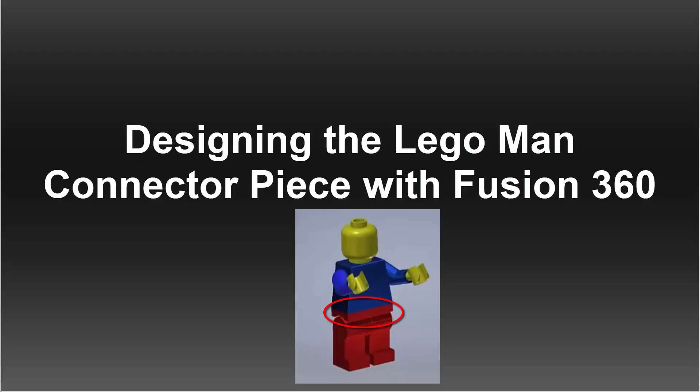Come on up to File, let's do a new design, and we're going to change our document settings from inches to millimeters in case you want to 3D print it. Then we're going to go ahead and start a sketch on our XY plane.

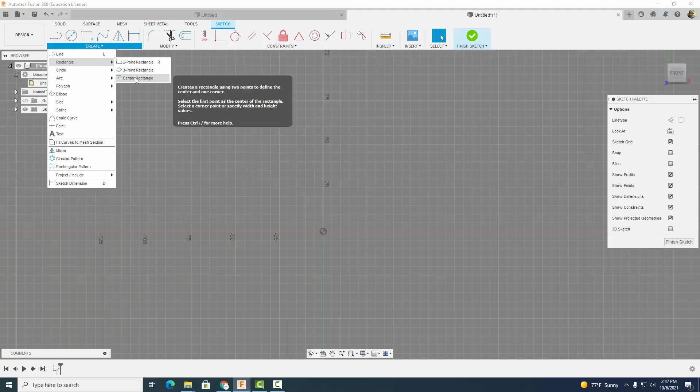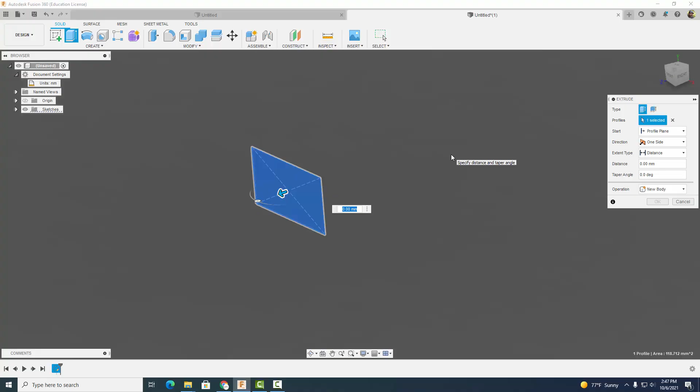We're going to come on up and grab our center rectangle, and drag out a square. I'm going to zoom in a bit. We want this distance here to be 7.81 millimeters. Hit the tab button, and we want our other distance to be 15.2 millimeters. Select Finish Sketch. We're going to extrude this a distance of 2.22 millimeters and select OK.

Now we're going to start a sketch on this face, and I'll rotate it over here, then grab our circle tool and drag out a circle with a diameter of 7.7 millimeters. We want this to be vertically aligned, and then we want this distance from here to here to be 3 millimeters.

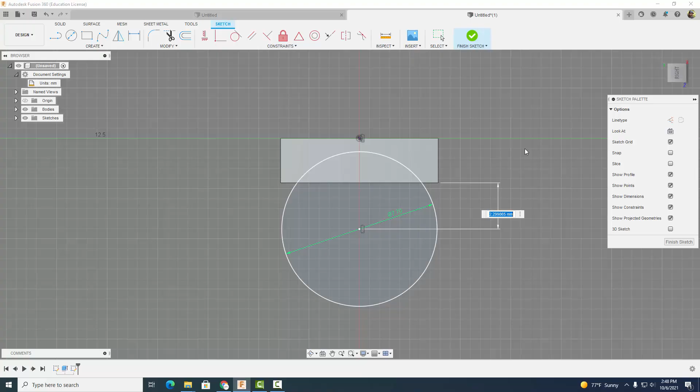Go ahead and hit escape and finish our sketch. Then we're going to extrude this and that a distance through all. Hit OK. So we have something that looks like this.

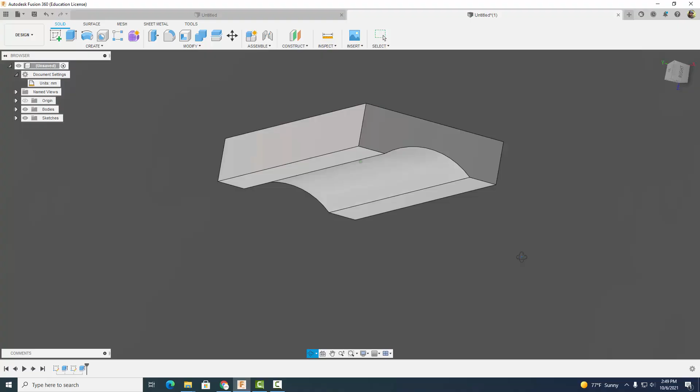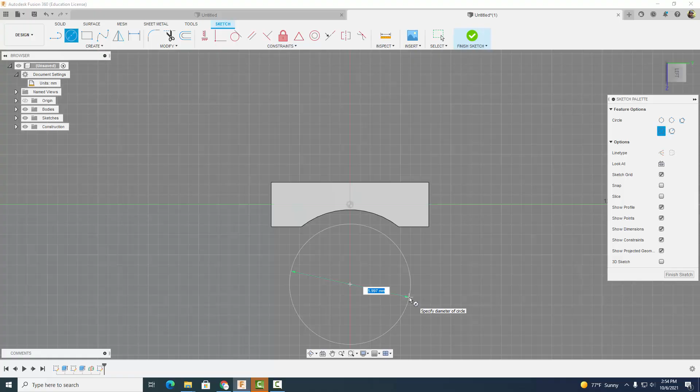Next we want to construct a midplane between this face and that face. Select OK, and we're going to start a sketch on that surface. I'm going to rotate it around, grab my circle tool, find this point, and drag out a circle with a diameter of 7 millimeters.

Hit enter. Now I'm going to grab my line tool, but let's project some geometry first. Let's come to project and do that face right there. Hit OK. Now let's use our line tool and come here straight down to our circle.

Now we're going to trim this right here, and we want this distance to be 0.4 millimeters. We want that on both sides to be consistent, 0.4, and we're good.

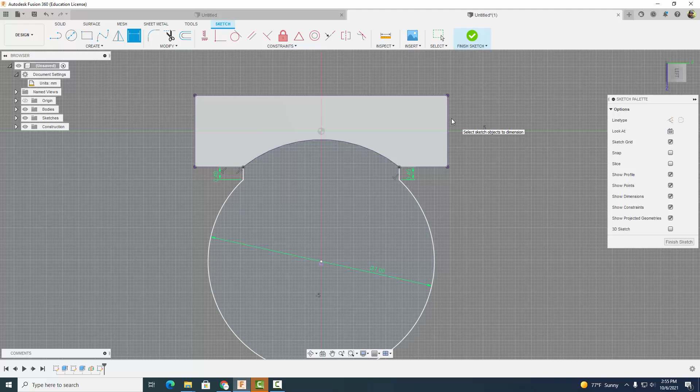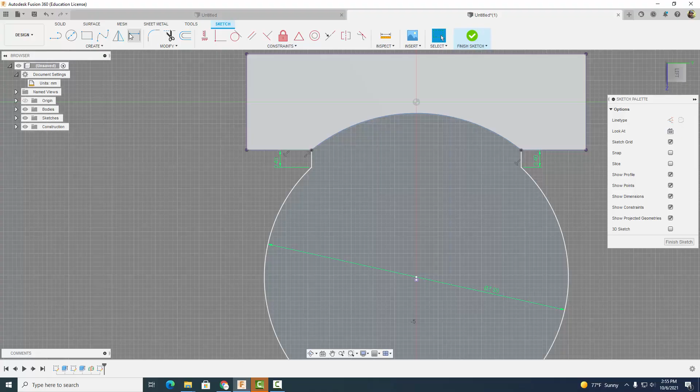Now I'm going to come over to my 3-point arc, click here, click there, and I want my line to be on that projected geometry. There's a way to double check that: if you hit escape and dimension this, recall the circle was 7.7, so we do 7.7 divided by 2, and there we go. Now we know we're on that line.

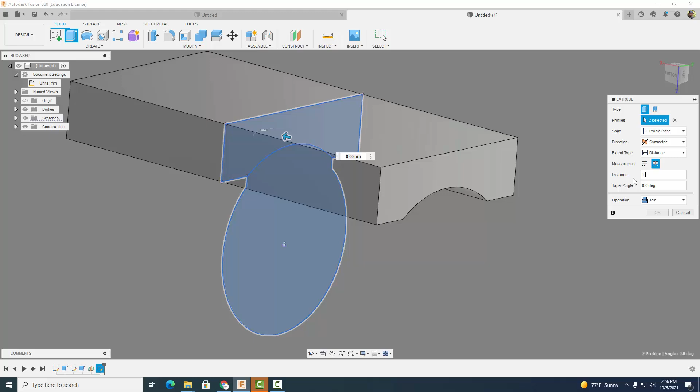Now let's finish our sketch and extrude this out. We're going to select a symmetrical way, a distance of, let's see here, that one and that one, and like I said, we're going a distance of 1.5 out. Select OK.

So you get something that hopefully looks like this. Now let's start a sketch on this surface. I'm going to rotate my part around and project some geometry, getting this circle right here. Hit OK. So now the center of the circle shows up.

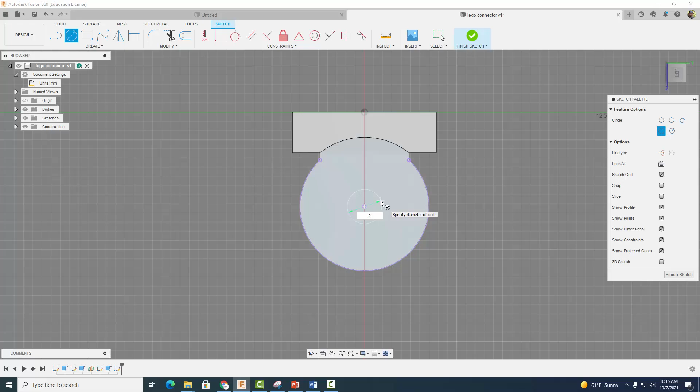We're going to grab our circle tool and create a circle with a diameter of 2.3 millimeters. Hit enter, let's finish our sketch. Then we're going to extrude this out a distance of 2.8 millimeters and select OK. Then we're going to start a sketch on the surface of this guy.

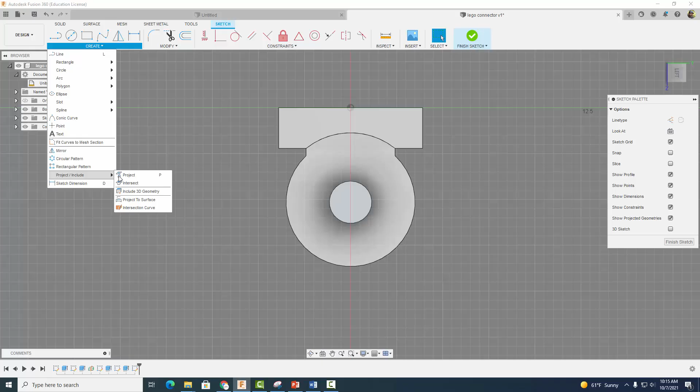I'm going to rotate it around just like last time, and project geometry just like last time. I'm going to zoom in, so now we have the center of the circle showing up. I'm going to draw another circle here with a diameter of 1.8. Hit enter.

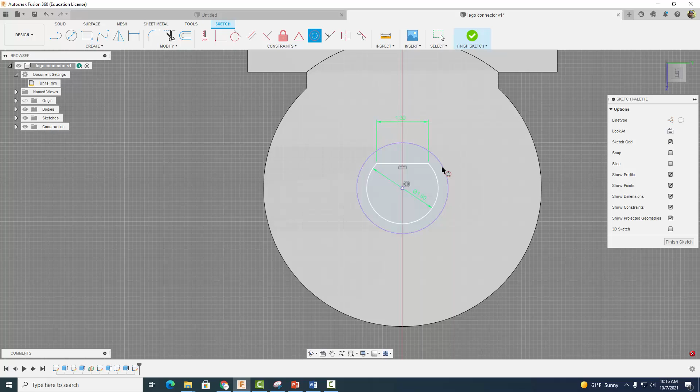Then we're going to grab our line tool and drag a line across, something like that. We're going to trim this top portion and dimension this part to be 1.3. Hit enter. I'm going to add a concentric constraint just to make sure these two are concentric. Looking good, let's finish our sketch. Now we're going to extrude this part out just a distance of 1 millimeter. Select OK.

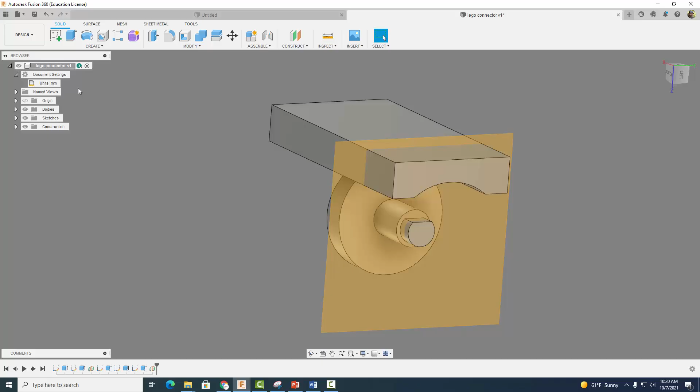Now we're going to create a midplane between this surface and this surface, then start a sketch on there. Once again I'm going to rotate my part around and project some geometry of this, hit OK, and then we're going to offset this a distance of

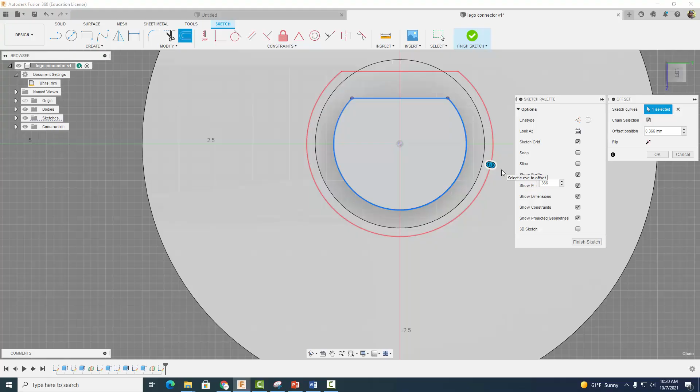0.366. Select OK. And then we are going to draw some lines down, from here, something like right here, down to our offset here.

Okay, now let's go ahead and do some trimming real quick. We're going to get rid of that guy, that line, and that line, so we just have this portion right here. Let's close our loop and add a 3-point arc so that we go from here, click there, and then we are going to draw it right on there.

Okay, now let's add some dimensions. We want this distance right here, actually this distance right here, let's make that 0.5. And the same thing on the other side, so we're symmetrical, 0.5.

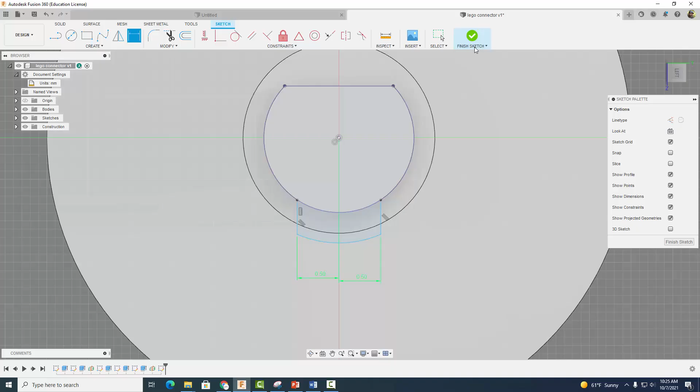All right, and then we are good. Let's go ahead now and finish our sketch. Okay, and we are going to go ahead and extrude this feature a distance of minus 0.5 millimeters. Okay, and go ahead and select OK. So you end up with something that looks like this here.

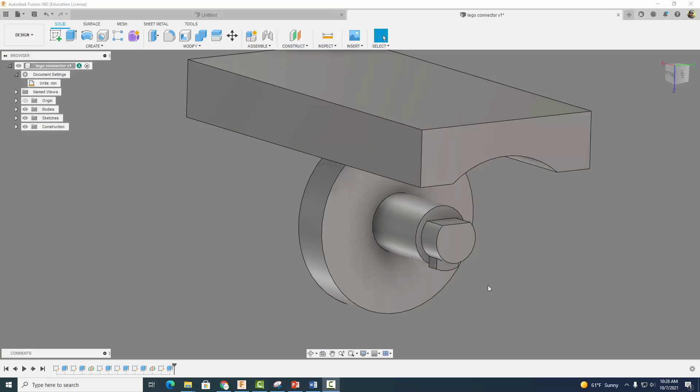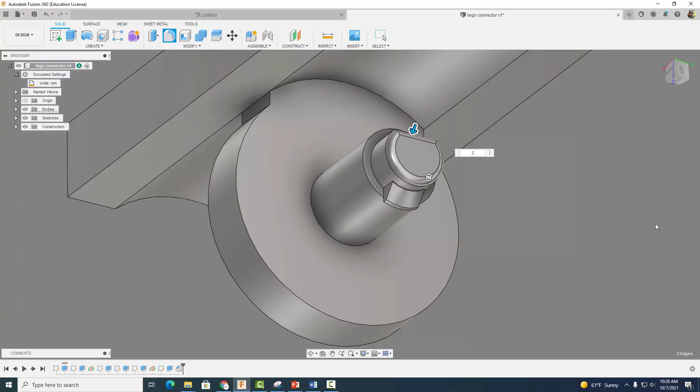All right, so the next thing we're going to do is we're going to add a chamfer and a fillet. So let's go ahead and add that chamfer on this face, this little edge right here, and it's going to be 0.35 millimeters. All right, hit OK, and then we're going to add a fillet to this part right here, and we're going to make that 0.2. Okay, select OK. All right, so we have something that looks like that.

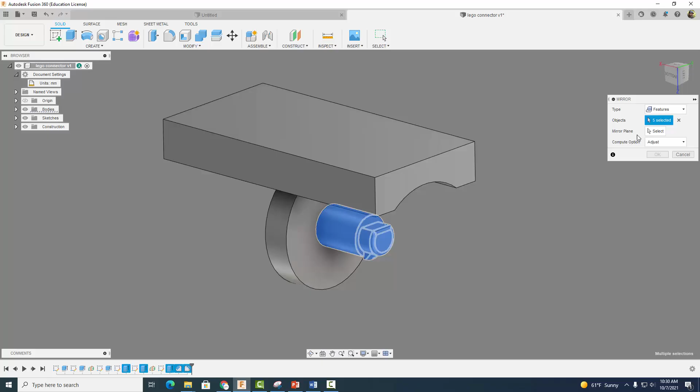All right, so now let's go ahead and mirror this guy, this feature that we made. So we're going to go to mirror. Okay, select features, and we're just going to select everything that we made here. All right, and for our mirror plane, it should be one of the ones that we used before, that one right there. Select OK, and there we go. We have it now on both sides.

All right, so now we want to go ahead and start making the portion on the surface here that connects to our body. So we're going to go ahead and start a sketch right here.

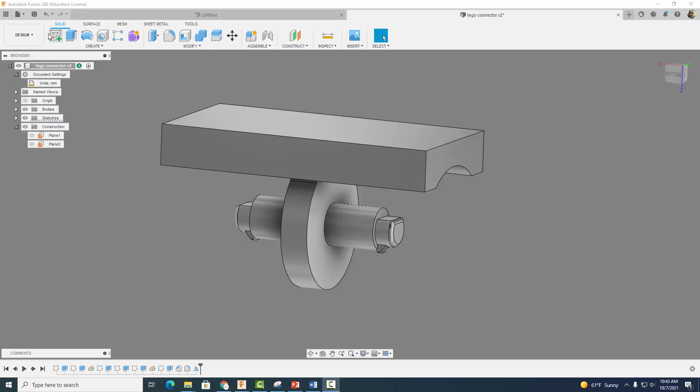We're going to come on over and create a center rectangle. Okay, I'm going to make it so that it's in line with this, and we're going to make it 4.7 by 4.7 millimeters here. Okay, now we're going to dimension it so we have the proper location, and we want this dimension right here to be 3.2.

And then this dimension over here to be, whoops, excuse me, from this edge to the center, we want that dimension to be 3.905. Okay, and so we're good.

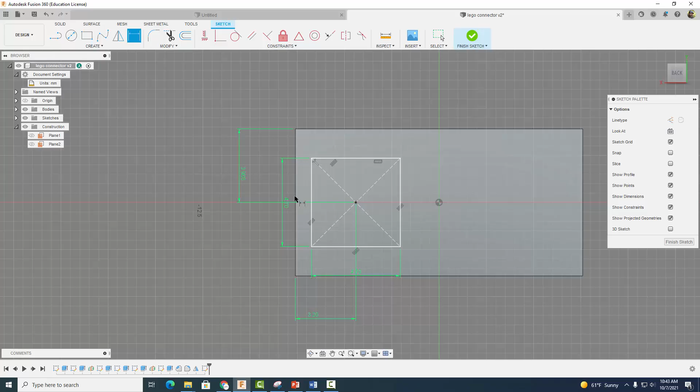All right, so the next thing we want to do now is we're going to come on in and we're going to add some small little arcs here, okay, to every corner. And I'm just going to kind of click here and something like that on every corner. Make them something that looks like that, okay? All right, looks good.

So I'm going to hit escape, and we're going to come and trim some stuff here. We're going to trim this guy and this guy and this guy for every corner.

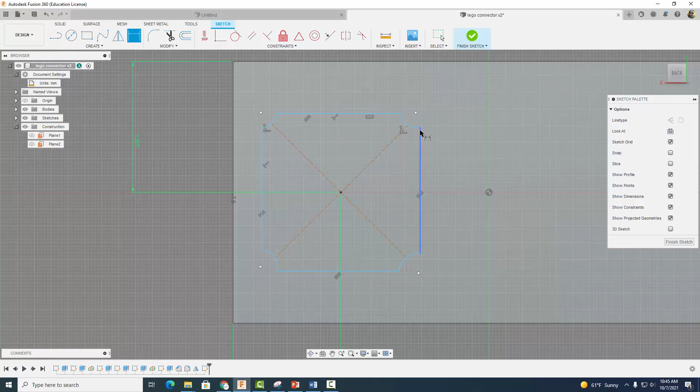Now we're going to start adding a lot of dimensions here, so follow along carefully. We're going to go from here to here. We want this distance to be 1.35. From here to here, same thing, 1.35. And we're going to do that all the way around, 1.35, 1.35, so we've done that all the way around.

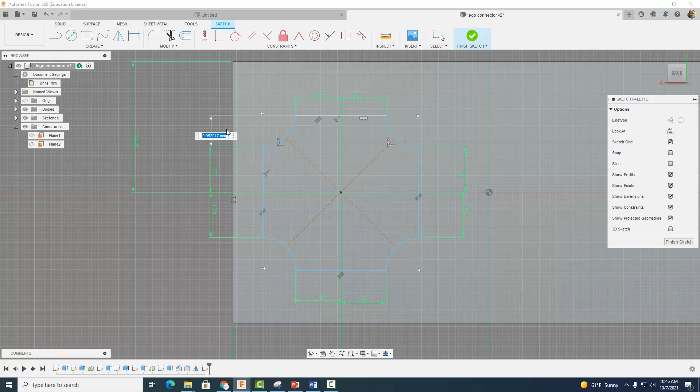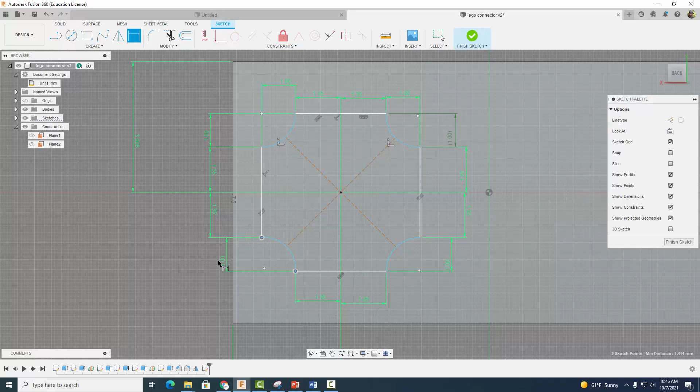Now we're going to add some more dimensions here. We want this distance to be 1, and this distance over here to be the exact same, so we're going to go with 1. And we're going to do that once again all the way around. And we're good there. I'm going to hit escape. We're good there, I'm going to hit escape. And we're good on 1 there too. So we're pretty much good.

The only thing we need to do now is dimension our arcs. So hit escape a bunch of times and come on over here, we want that to be 1.5. This to be 1.5. This to be 1.5. And this as well to be 1.5. So we have a very symmetrical shape right here with all the right dimensions. I'm going to delete this driven dimension here since it's already on there.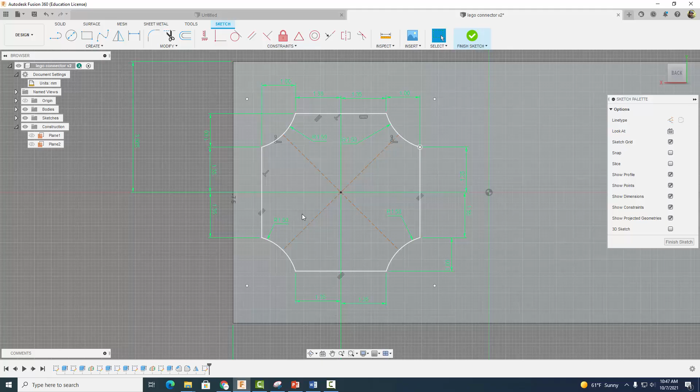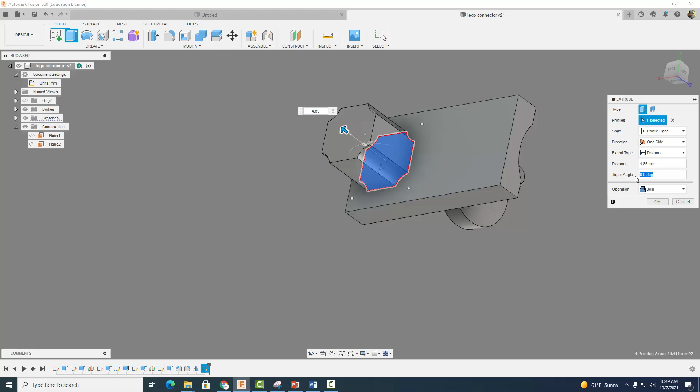So once your sketch is fully constrained, you'll know it's fully constrained when all your lines show white. Okay, so we're going to go ahead and finish our sketch now. We're going to extrude this guy up a distance of 4.85 millimeters, and we're not quite done yet. We want to add a taper angle of -2. Okay, and then we're good. Select join and hit OK.

Okay, so you hopefully have some. All right, so next thing we're going to go ahead and start a sketch here. Okay, and I'm going to rotate it around here so it looks something like this.

And then I'm going to grab a line tool, and somewhere, actually let's project some geometry first. So I'm going to do that line and that line, hit OK. And then somewhere right around in here, I'm just going to drag out a line, and it goes up kind of to here, then over to here, then down. I didn't close my loop, so there we go. So we have like this triangle. Let's make it a right triangle, so that's perpendicular to that.

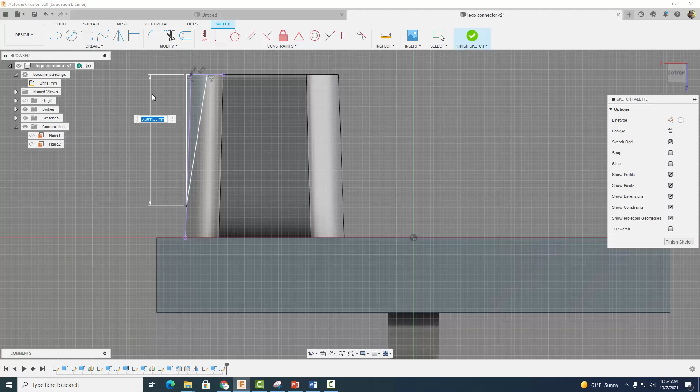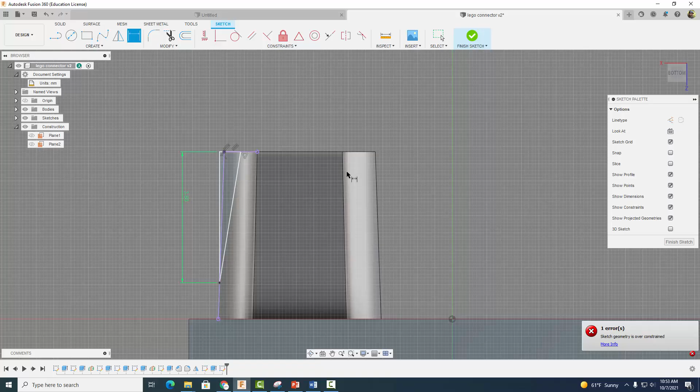All right, and now we're going to add some dimensions. We want this distance here to be 3.8 — this distance from here to here. Okay, we're good there. Let's see, this distance right here. Okay, we're going to over constrain it, we don't want that. Let's give it an angle here. Nope, we're good there. So I think we're good, it looks like we're fully constrained, all of our lines are white.

So let's go ahead now and finish our sketch. And then we're going to extrude this portion, cut a distance through all. Hit OK. Okay, so now we have kind of like this shaved off side here, and if you look at the Lego man connector piece, you'll see that.

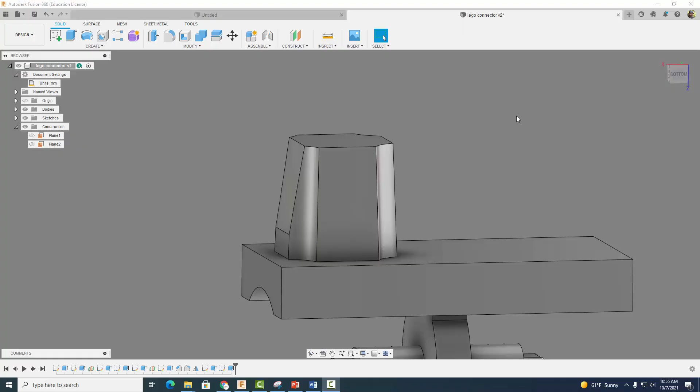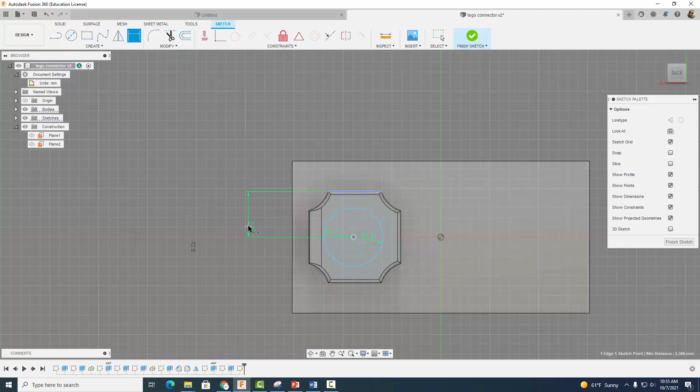All right, so the next thing I want to do is hollow out these features. So we're going to start a sketch there. I'm going to grab my circle tool, and somewhere, well right here, I'm going to drag out a 3mm circle. Okay, and we're going to dimension it now so that it is 2.35 from that edge, and 2.376 from that edge.

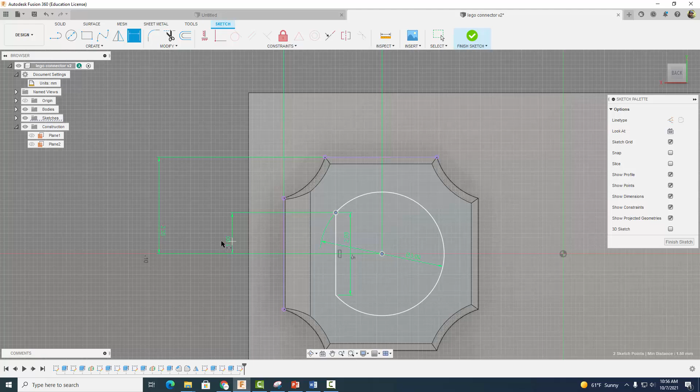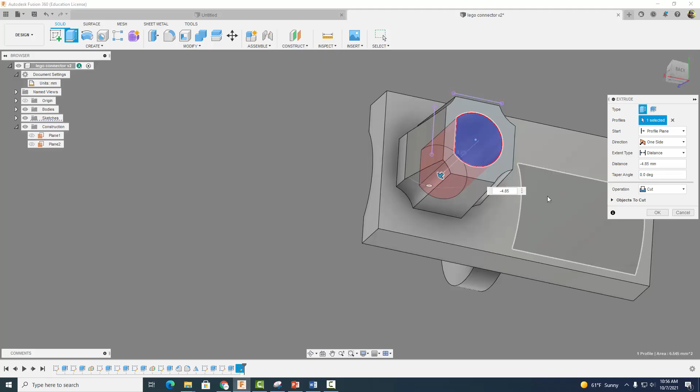Now let's go ahead and finish our sketch. And, whoops, we're going to go ahead and extrude this distance, okay, minus 4.85, to where it hits this surface right here. Just make sure it says cut, select OK. Okay, looking more and more like our connector piece there.

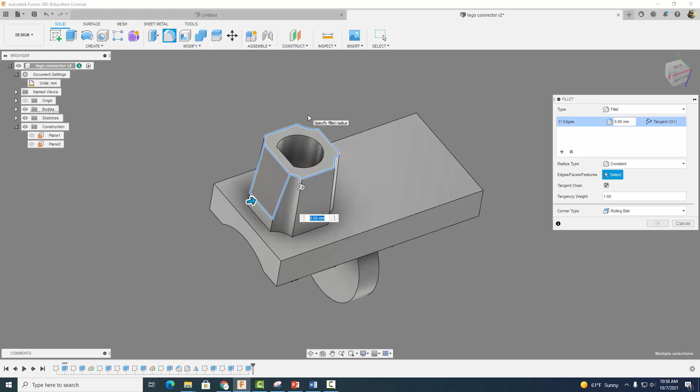All right, so now we're going to go ahead and add some fillets here, okay, because if you look at the Lego man very carefully, you'll notice it's kind of rounded up here, right? And we're going to do this all along the top edges here, and then one right there, one right there, and one right there, and we're going to make those all 0.5. Okay, hit OK.

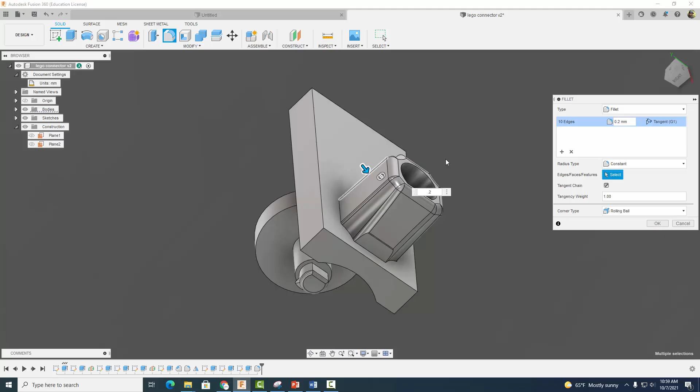And like I said, if you really take a careful look at the parts of the Lego man connector piece, you'll notice that these are not sharp edges. So we're going to add some very, very tiny fillets on those guys right there and right there, and we're going to make those 0.2. Okay, and hit OK.

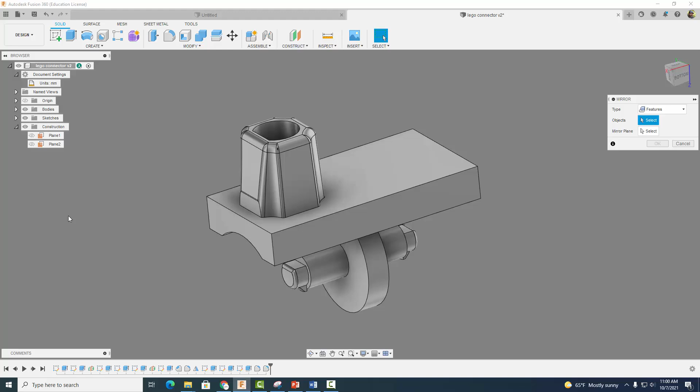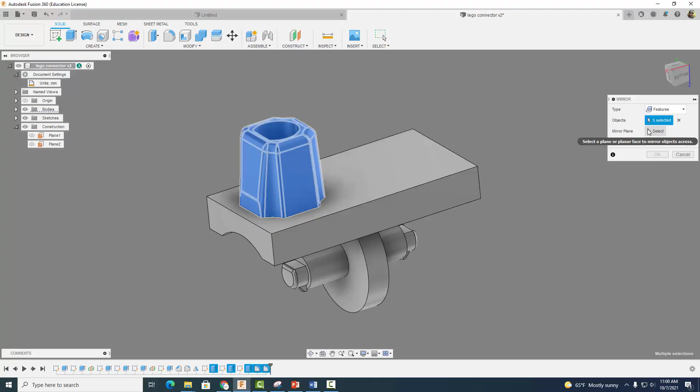So we're done with this feature now, and you probably know what's coming up — we're going to have to go ahead and mirror it so we have them on both sides, if you've ever seen a Lego man connector piece. So we're going to come on over here, go to Create, down to Mirror. And this is where it's going to get a little tricky because we have a lot of features to mirror here, we've got to get all those fillets, as best you can. I think that's almost everything — oh, that circle too. All right, let's go ahead and select our axes, and we have — is it that one? That one right there, plane number 1 I think is what we want, and go ahead and select OK.

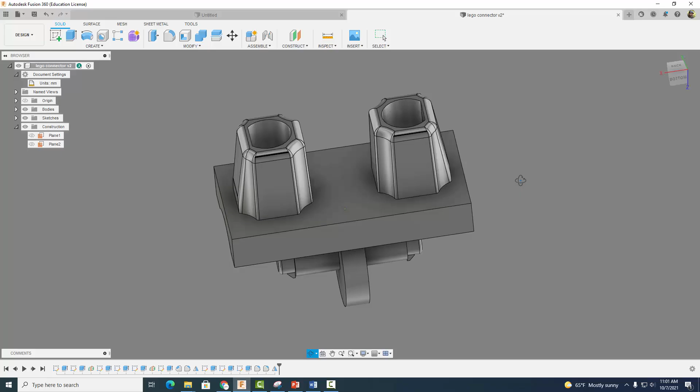All right, it looks pretty good, I think we got it mirrored successfully. All right, make sure when you mirror it, you get all those fillets on there as well, okay? And you'll be able to tell the difference because it'll be a sharp single line here instead of a fillet, okay.

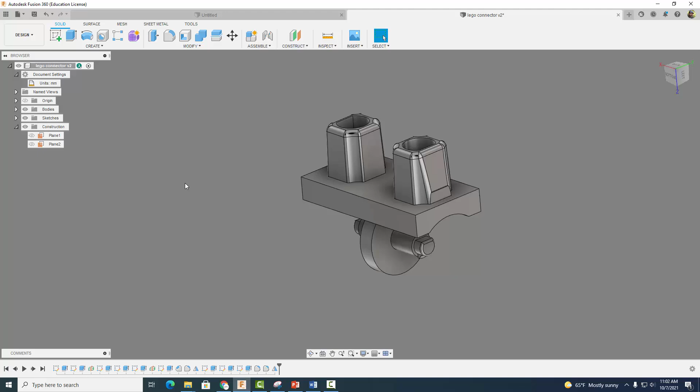Now that we're done, we want to go ahead and just assign it a color. So to be consistent, I'm going to make mine red, okay, with a paint. I'm also going to assign it a material of ABS plastic, because that's what Lego parts are actually made of. Go ahead and select Close.

All right, and when you are done, double check to make sure you've mirrored everything correctly. Go ahead and save it, okay? And that'll do it for this Lego man tutorial.